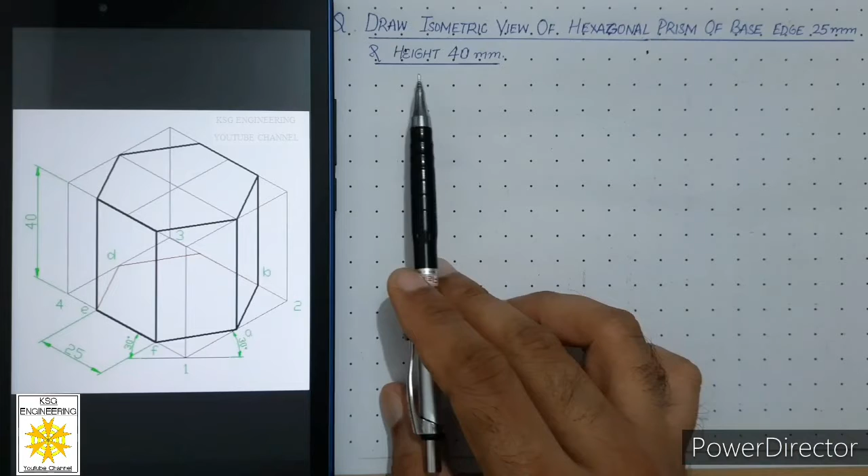Welcome students. Today we will solve isometric view of hexagonal prism of base edge 25 mm and height 40 mm.

So let us see what steps we need in order to draw the isometric view of hexagonal prism. The very first step is we have to draw hexagon on the grid sheet. In this question, we are given hexagonal prism whose base edge is 25 mm. It means hexagon is of 25 mm. So first of all, we will draw hexagon on the grid sheet.

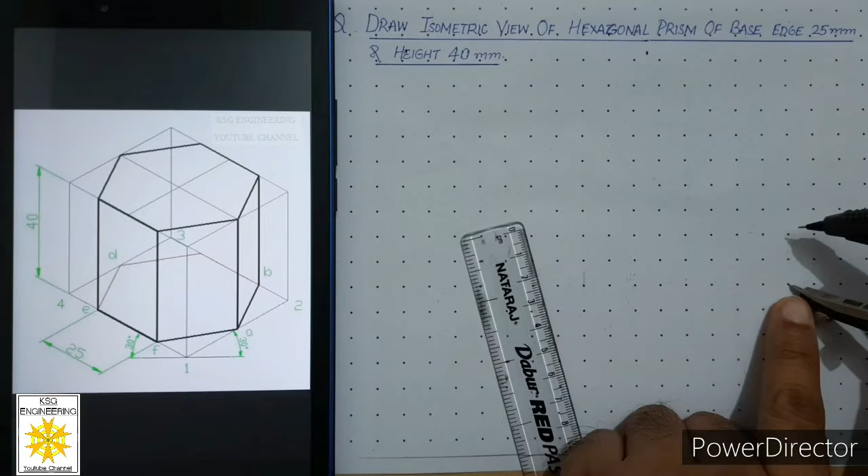So in order to draw the hexagon on the grid sheet, we have to see the size of the hexagon. So size of the hexagon is 25 mm. So we will open compass to 25 mm and we will place compass on a particular dot. Let us say this dot, and we will draw a continuous thin circle. We will keep it thin, and the radius of this circle is equal to the length of the side of the hexagon, that is 25 mm.

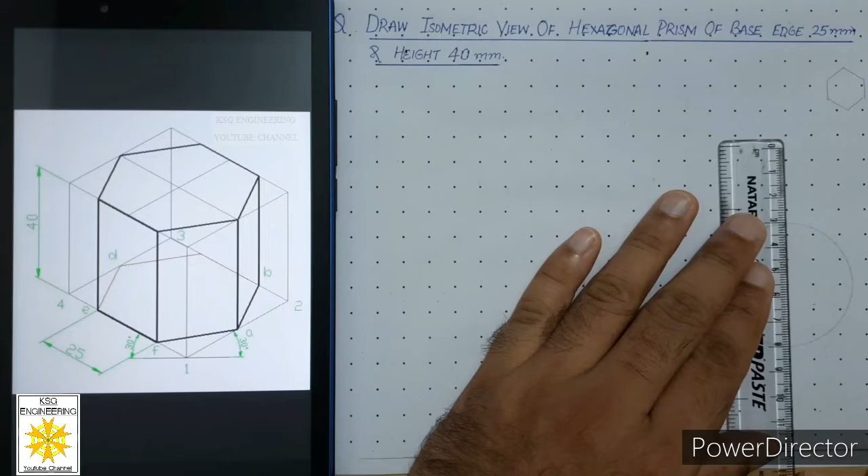Now after this, we will draw vertical diameter of this circle if we want this position of the hexagon. So let us draw vertical diameter. So we will line our scale with this column and we will draw a continuous thin line over here. This is the vertical diameter of this circle.

Now we will open compass again equal to 25 mm, which is the size of the hexagon, and we will place compass at this diametric end and we will cut circle on both sides by thin curves. So the size of the compass is equal to the size of the hexagon, 25 mm. After that, we will place compass at this point, that is the second diametric end, and we will cut circle on both sides of this vertical diameter.

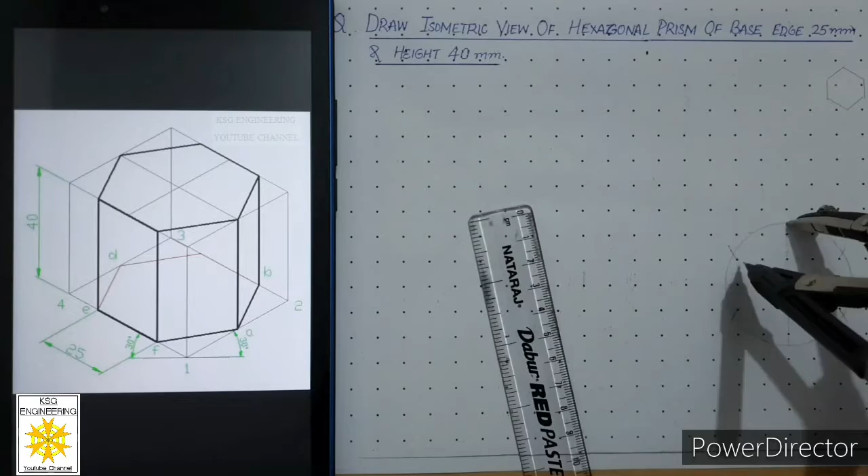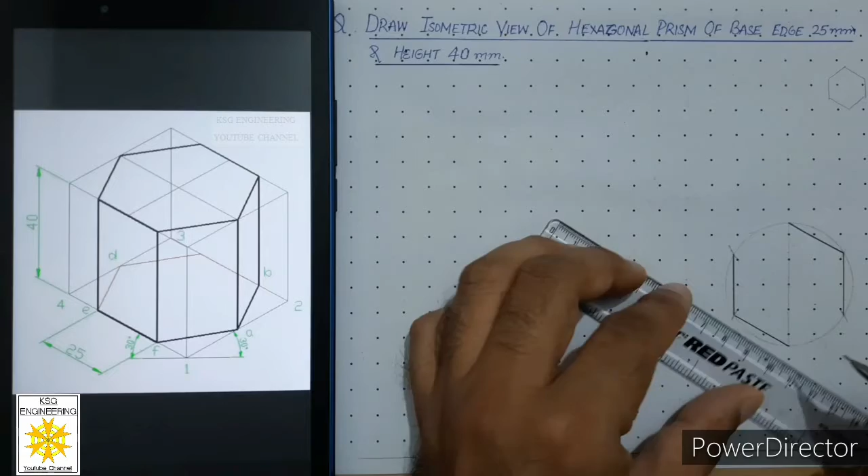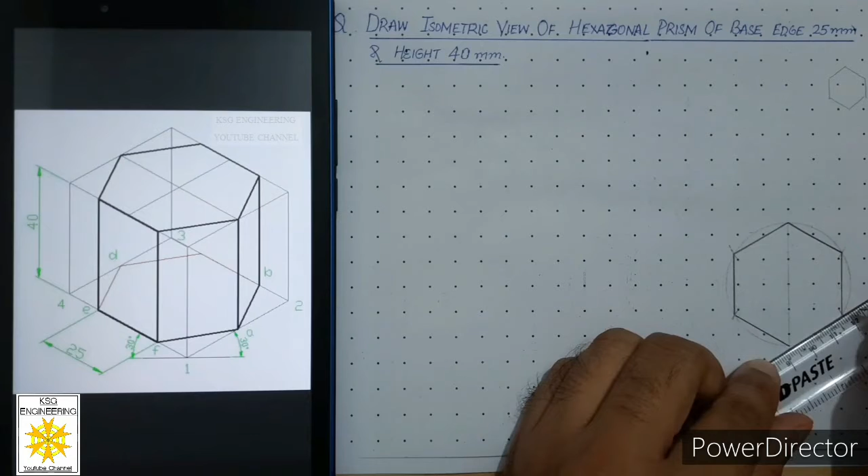Keep arcs thin. Then after that, we will join these 2 points with the help of straight line. Then we will draw straight line in between these 2 points. Then we will connect these 2 points with straight line. Then we will connect these 2 points. We have to draw a hexagon thick over here. Now let us connect these 2 points with straight line. Now let us connect these 2 points with straight line.

So in the first step, we have to draw the hexagon on the grid sheet. Now after this, we will erase this circle. Now we will name the hexagon. Let us start from this point and let us name it as A, B, C, D, E, F.

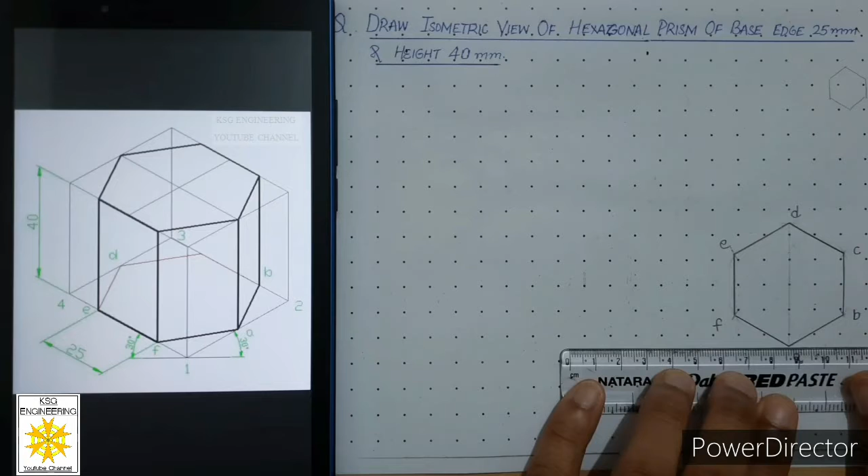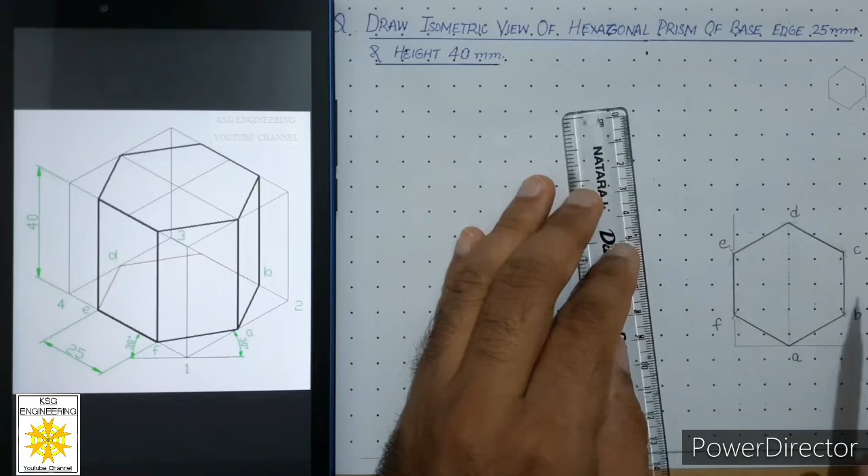And after this, we will enclose this hexagon inside a box. So for that, at this point of the hexagon, we will draw continuous horizontal line, continuous thin line, and then we will draw continuous thin line over here. That means we will extend this side of the hexagon on both sides with continuous thin line. Then we will extend this side of the hexagon on both sides with continuous thin line.

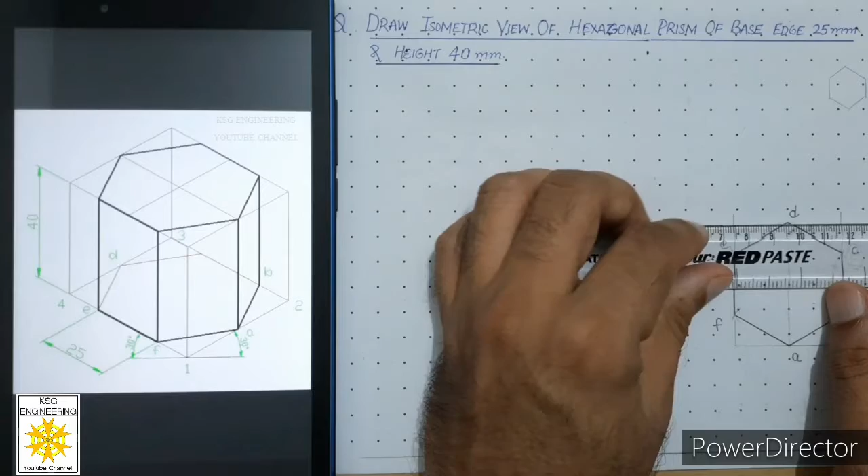Then from this point of the hexagon, we will draw horizontal line and we will keep that line continuous thin. So we have enclosed this hexagon inside a rectangle. So let us erase these extensions. Remember, we have to keep this box thin. Now we will name the box also. Let us name it as 1, 2, 3 and 4. So second step is enclose that hexagon inside a box.

In the next step, we will draw the isometric view of hexagonal prism. So remember one thing, whenever we have to draw isometric view of a hexagonal prism, first of all we have to assume that hexagonal prism is enclosed inside a box. So first of all we have to draw isometric of that box first, and after that inside the isometric of that box we will draw isometric of hexagonal prism.

Now in this case the length of this box will be equal to the distance across flat faces of the hexagon, and width of this box will be equal to distance across the corners of the hexagon. Now at the start we don't know what will be the distance across flat of the hexagon or across corners of the hexagon. So in order to know those distances we have done this step.

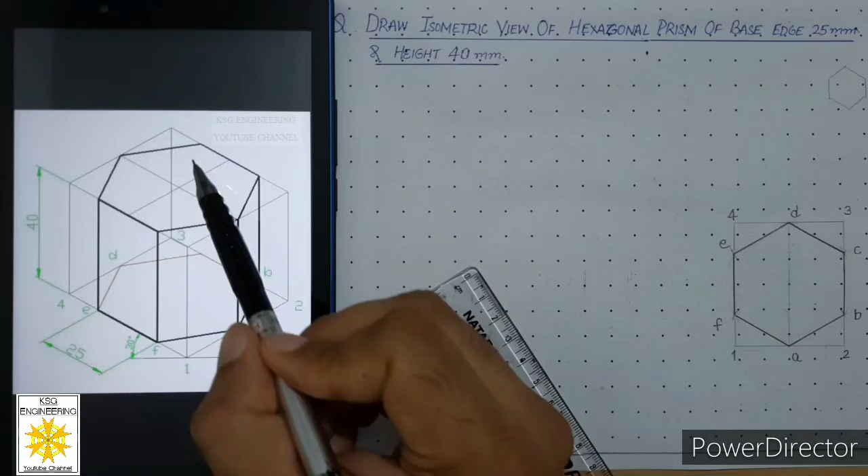Actually in this step what we are representing is that this is the top view of the hexagonal prism. When we look at this prism from top, we will see a hexagon only. And if we have assumed that the hexagonal prism is enclosed inside a box, then from top along with the hexagon we will see the top view of the box also.

That is why after drawing the hexagon we have drawn that box. So this is the top view of this situation when the hexagonal prism is enclosed inside a box. So from top we will see the top face of the hexagonal prism, that will be a hexagon, and we will see the top face of the box, that will be a rectangle.

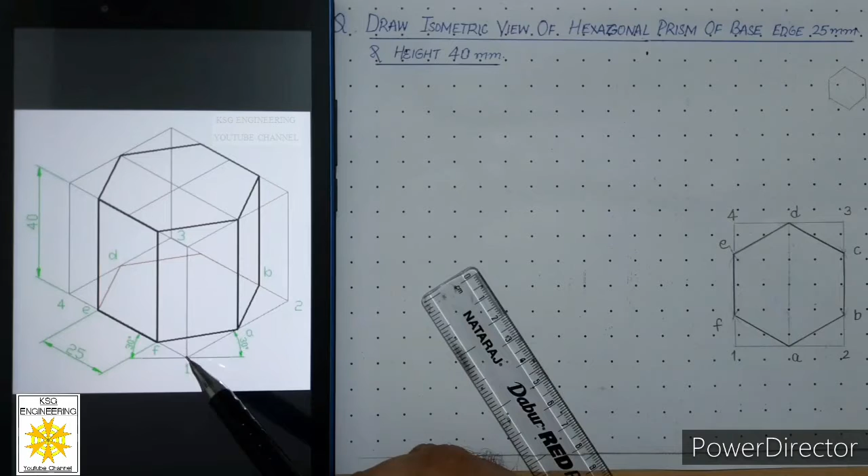Now from this particular drawing we will get the distance across flats of the hexagon, that will be the length of the box, and we will get the distance across corners of the hexagon, so that will be the width of the box. That is why this step is important and we have to do this step first.

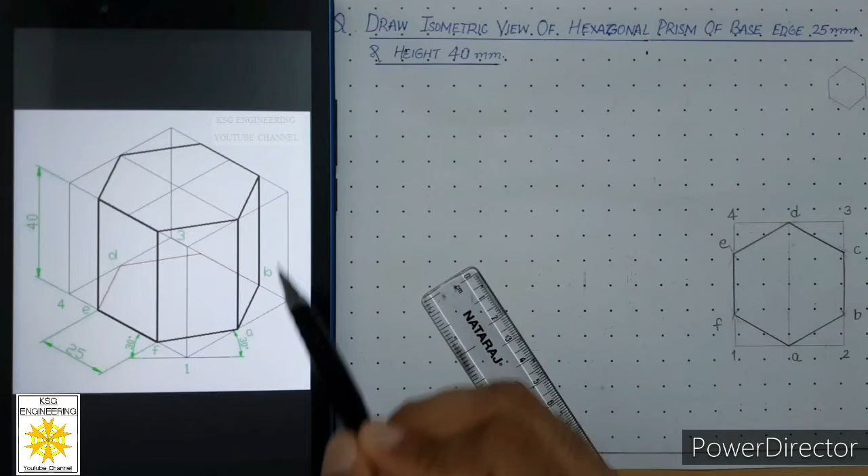From this step we will get to know the length of the box and the width of the box, because before drawing the isometric view of the hexagonal prism we need to draw the isometric view of the box. So this method is known as box method. Okay, so let us start with the drawing of the isometric view of the box.

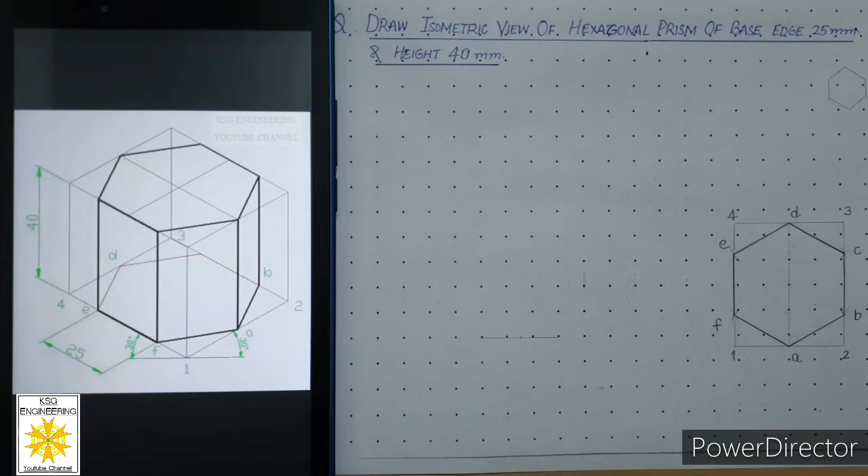So for that we will align our scale with this row and we will draw a continuous thin line of around 30 millimeters. On that line we will mark a point, and on that point we will put our protractor and we will draw two lines on both sides at 30 degrees. So these two are called isometric axes.

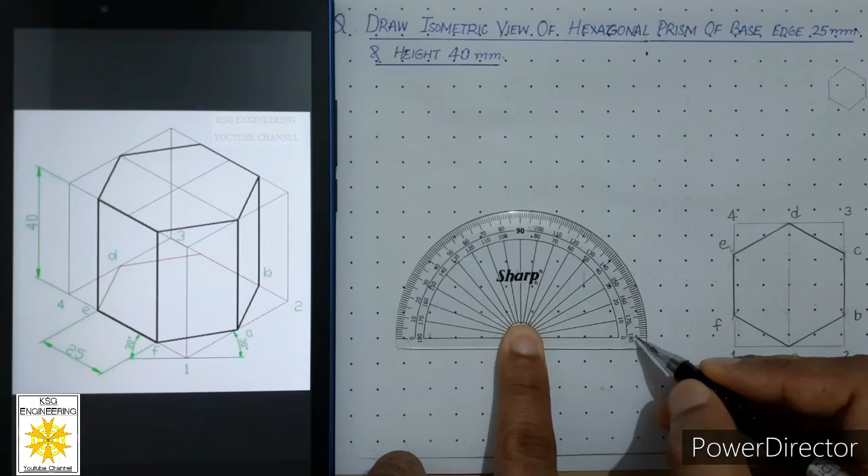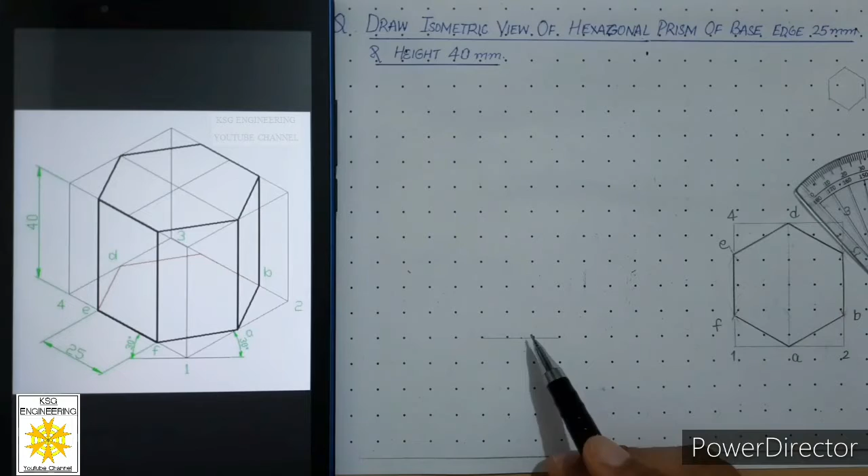So let us mark a point at 30 degrees on this side. Similarly mark a point at 30 degrees on the other side. After that we will align these 2 points with the help of the scale, and we will draw a continuous thin line that will be called an isometric axis. Then we will align these 2 points and we will draw a continuous thin line of any length at the start. So this is the second isometric axis.

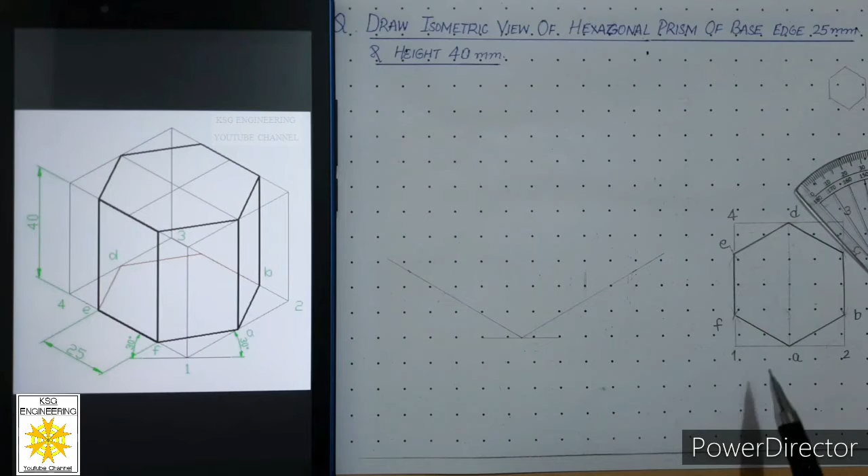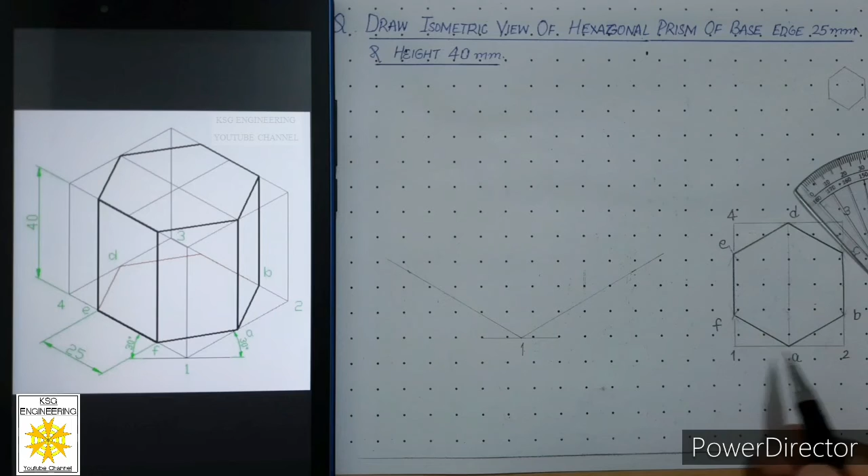Now first of all we need to draw the isometric of the box, and we know the length of the box is equal to this distance, that is 1 2. So let us assume that this point is 1. So let us mark it as 1. So on this axis we will draw the length of the box, which is equal to the distance between 1 2. So let us measure this distance with the help of the compass.

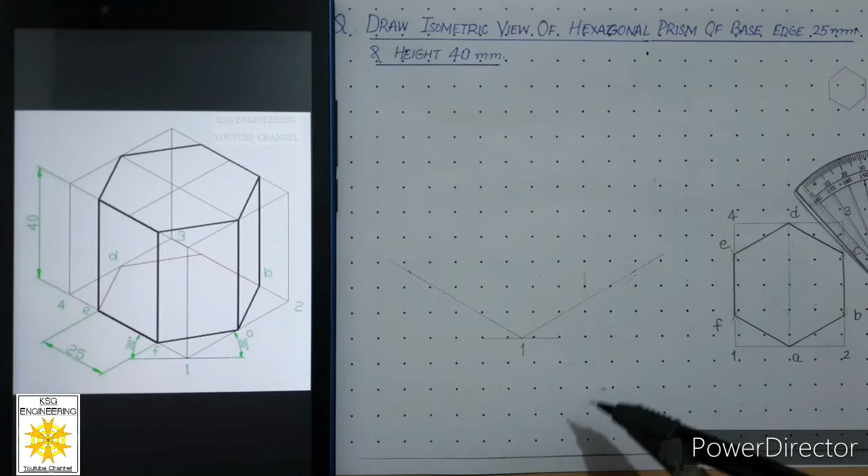Now we will draw that distance over here, meaning we will cut this isometric axis to that distance. So for that, put your compass at this intersection, that is point 1, and mark an arc on this isometric axis. And this point is point number 2. So let us label this as point number 2.

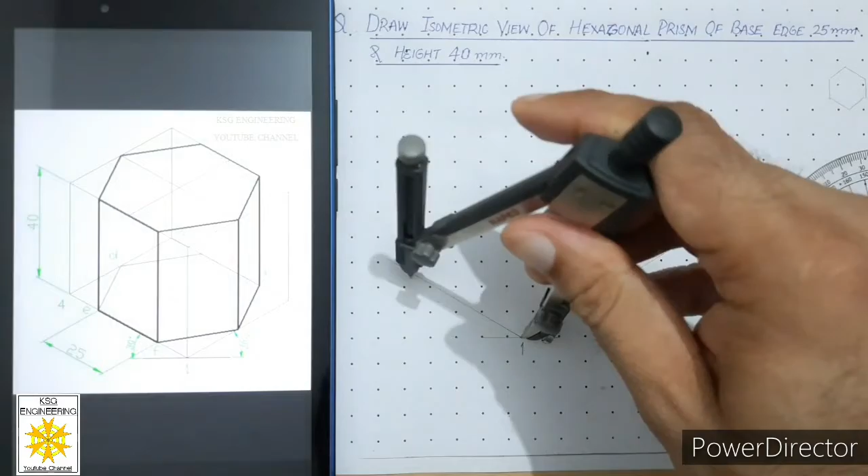On this side we will cut the width of the box. So the width of the box is 1 4. So let us measure its width, that is 1 4, with the help of the compass, and from point 1 cut this axis to the same distance. So this intersection is point number 4.

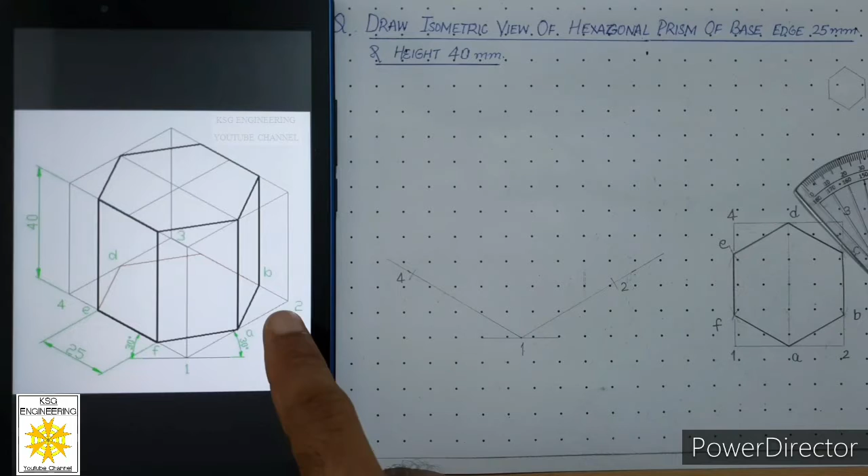After that, we will measure this distance again, that is 1 2, because in front of the length we have to draw a second length, because in order to draw the isometric of this box we first have to draw its base, or you can say the bottom face. So for the bottom face, after drawing length and width, we have to draw two more edges. So in front of width we have to draw width, in front of length we have to draw length.

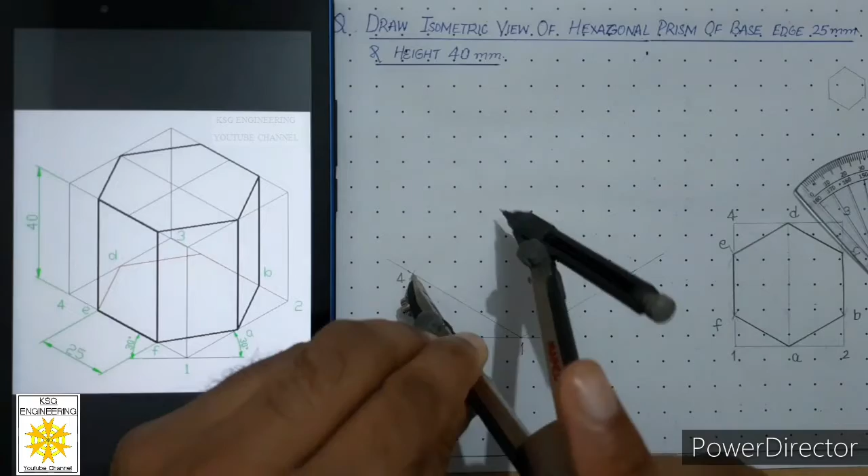So for this, we will measure this distance, that is 1 2, with the help of the compass again, and from point number 4 we will draw this arc. We will draw a thin arc over here. Now we will measure distance 1 4, that is the width of the box, and from this point we will draw another arc which will cut the first arc. So this is point number 3.

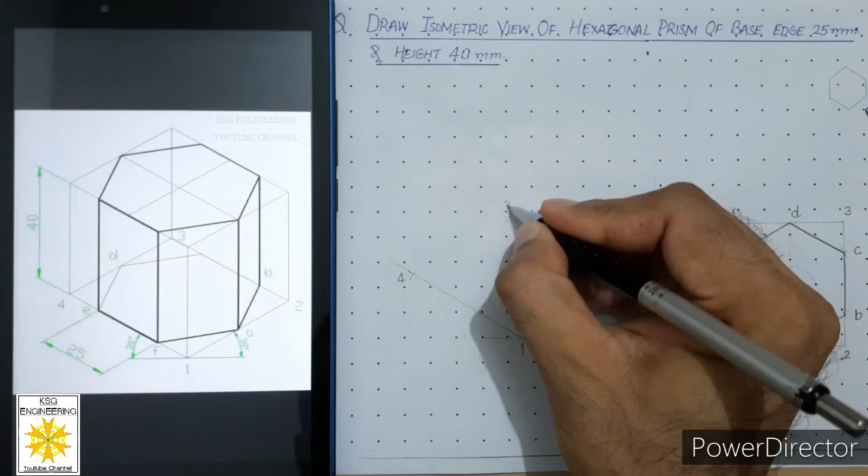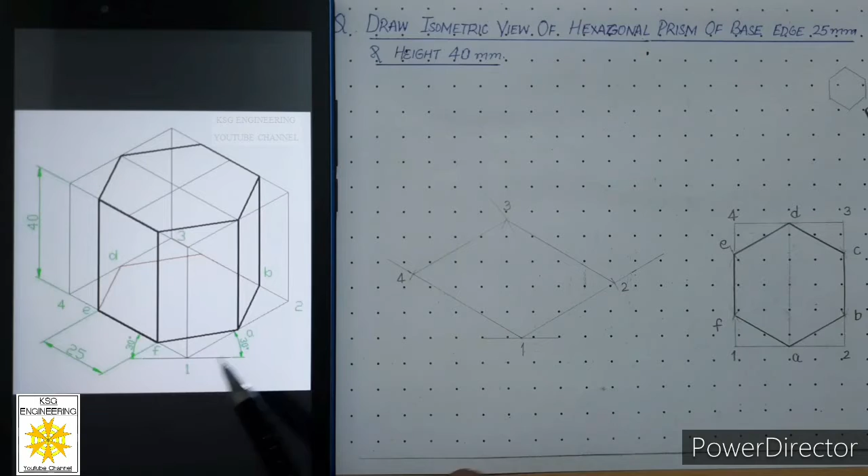Now after this we will connect these 2 points with thin lines. So you can see we have created the base of the box, that is the bottom face of the box. Now after this, we will raise these 4 corners of the box equal to the height of the prism given in the question, and that height is 40 millimeters.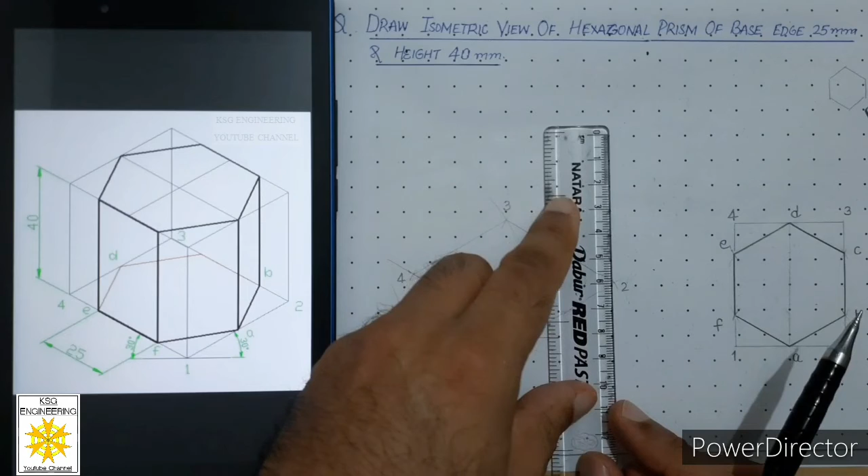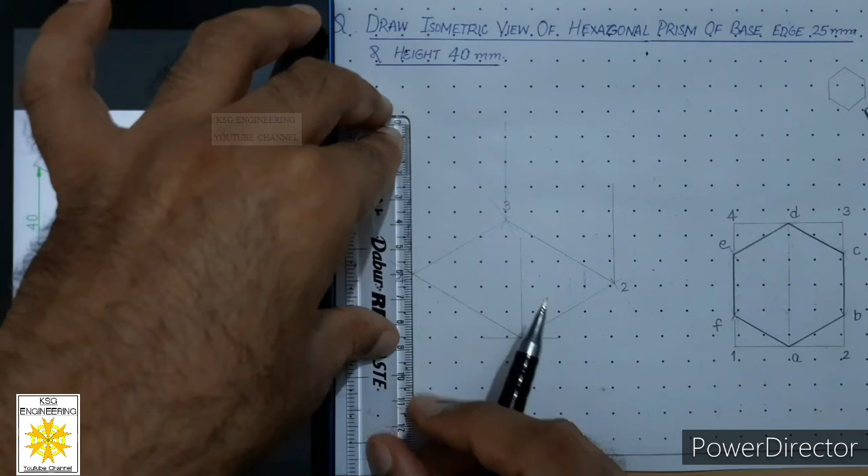So from these 4 corners we will draw vertical lines of 40 millimeters, and these lines must be continuous thin, and lines must be vertical, so align your scale carefully. Then from this point also, make sure lines are vertical, so align your scale carefully.

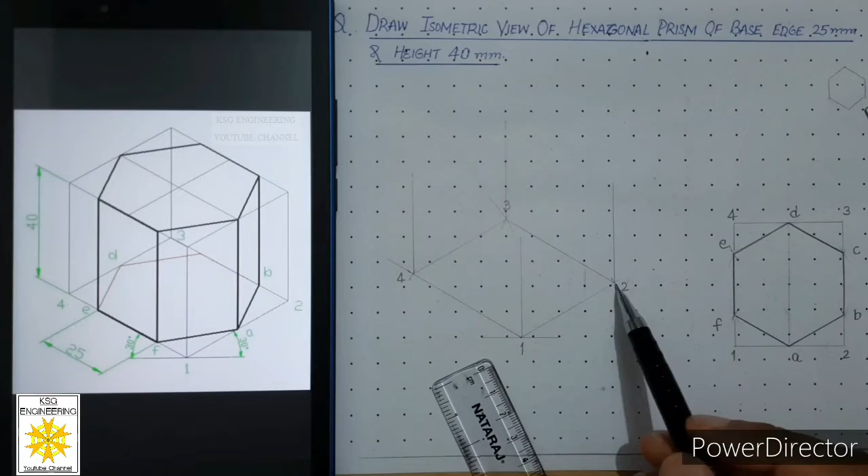So we have drawn vertical lines at 4 corners of the bottom face, meaning we have drawn the height of the box, that is 40 millimeters, equal to the height of the prism. Then we will connect these points at the top with continuous thin lines to draw the top face of the box. Remember, draw thin lines.

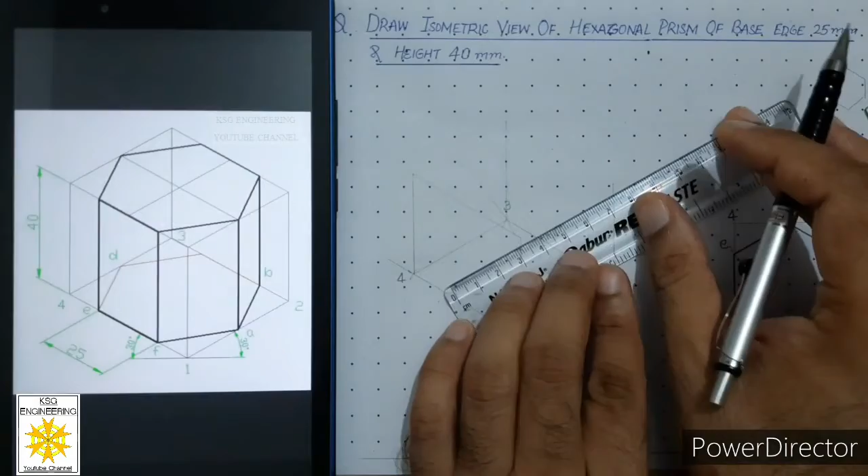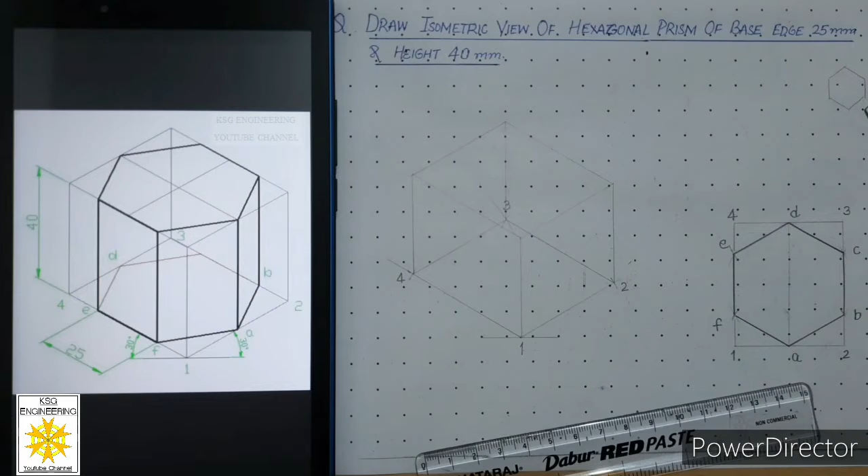So we are ready with the isometric of the box, in which we have assumed that the hexagonal prism is enclosed. Now we will draw the isometric view of this prism. So at the bottom face of the box, we will draw the bottom face of the prism, that is a hexagonal base. It means in this isometric of the bottom face of the box, we will draw the isometric of the hexagon. So let us see how we can draw.

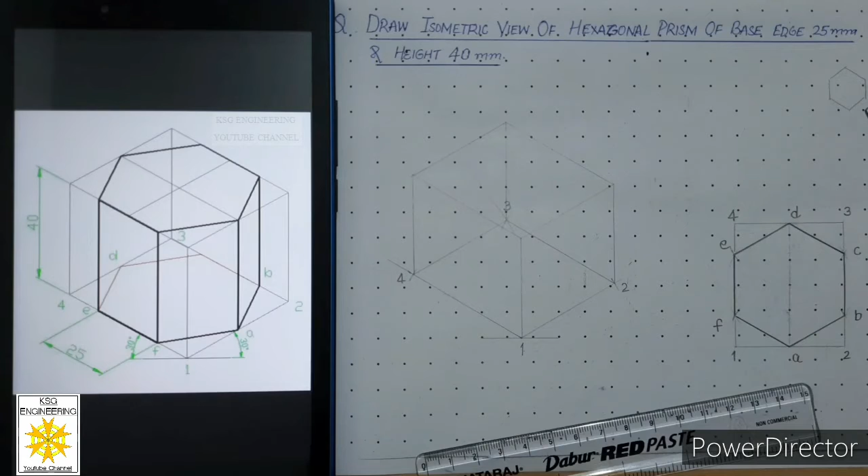Now you can see over here, this is the bottom face of the box, let us say, and let us say this hexagon is representing the bottom face of the prism. So in order to draw this hexagonal shape inside this box, we have to locate these 6 points on these 4 sides of the box. You can see on this side 1, 2, we have point A. So on this side 1, 2, we have to locate that point.

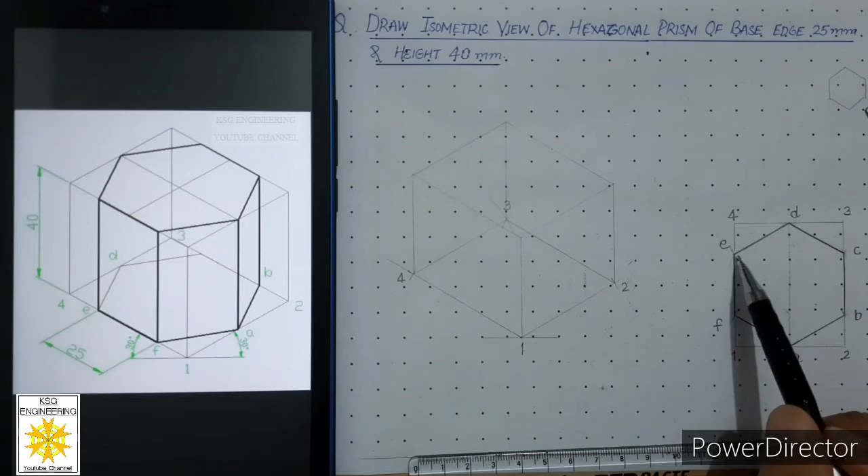Then on this side 2, 3, we have 2 points B and C. So these 2 points we have to locate on this side. Similarly on side 3, 4, we have point D. So we have to locate point D over here. Similarly, we have to locate points E and F of the hexagon between side 4, 1. So let us first locate this point A, which is in between 1, 2, that is on this side. So for that we need a compass.

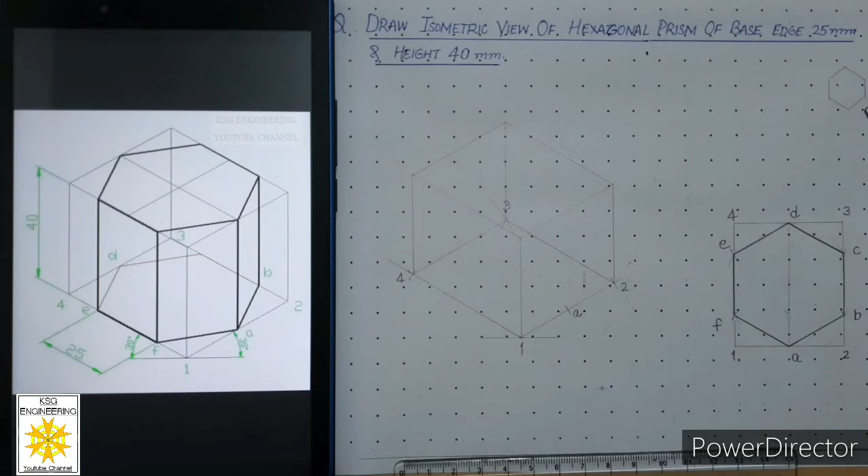We will put the compass at 1 and we will measure this distance, that is 1A. And we'll put the compass at this point and we'll mark that distance on this side labeled as 1, 2 over here. So this point is A. Now between side 2 and 3 we have 2 points B and C. So let us locate point B first, and remember, always measure distances from the corners. Don't measure distance from A to B, that will give wrong results.

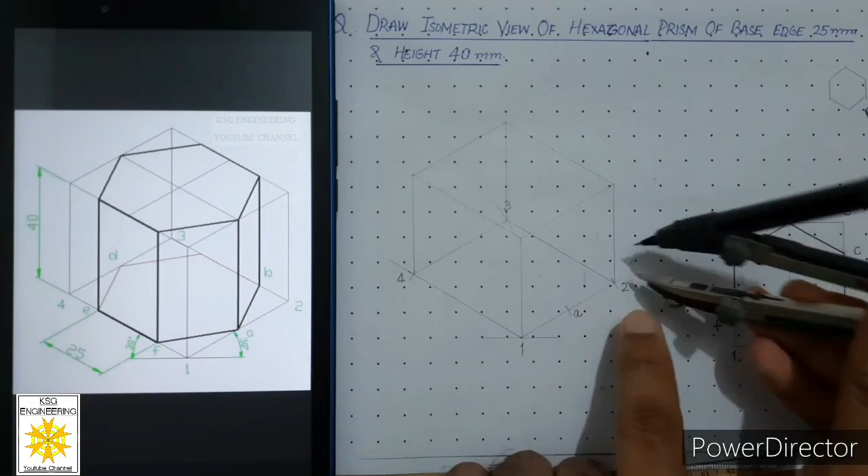Measure distance from the corners of the box, means from point 2 measure this distance to B and place your compass at 2 and mark that distance on this side. Now this will be called point B. After that we will measure 3C, that will be the same as that of 2B, but still let us measure. So see, it is the same.

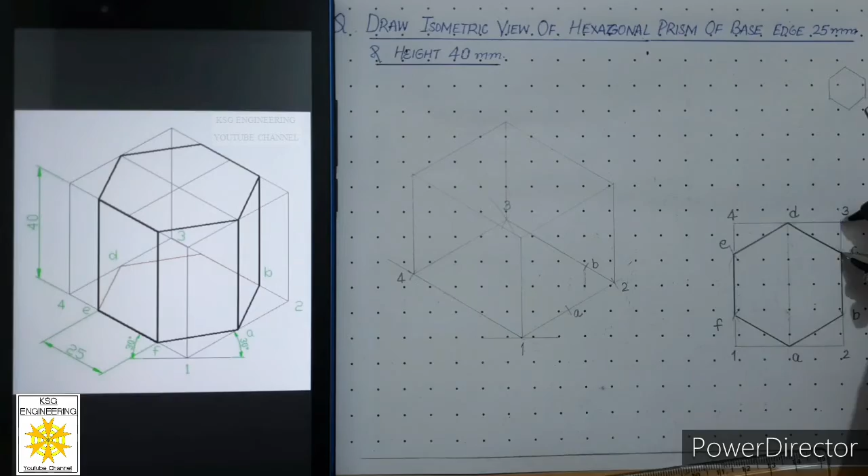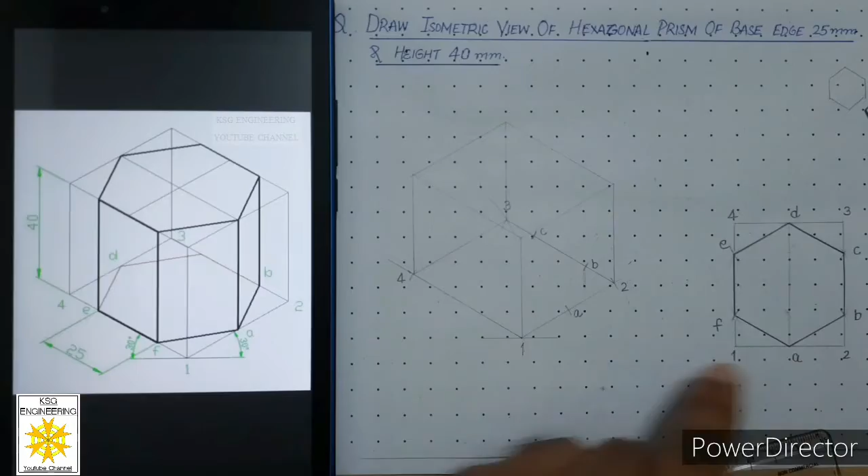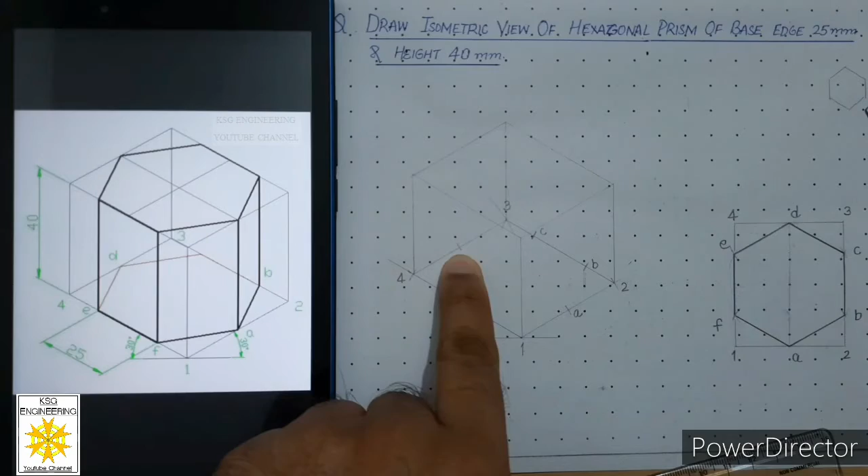So from point number 3, cut that distance on this length. Draw a thin arc. So this is point C. Then we will measure distance from 3 to D, which is equal to 1 to A. So put your compass at 3 and cut this length 3 to 4 by drawing an arc. So this point is point D.

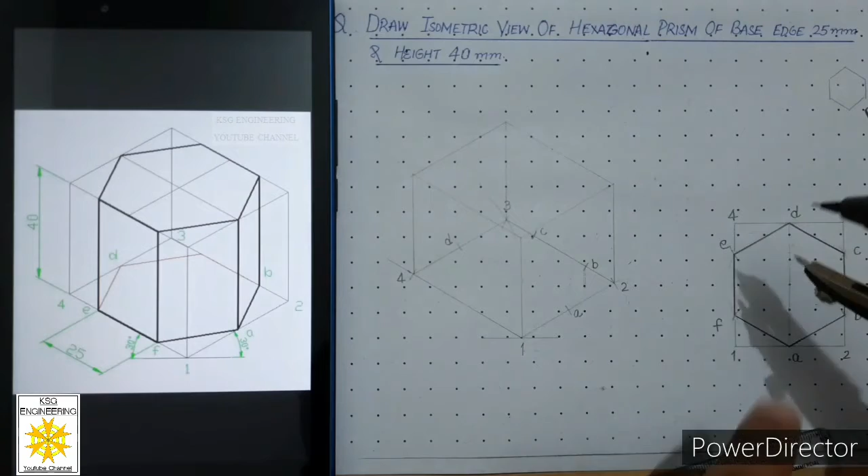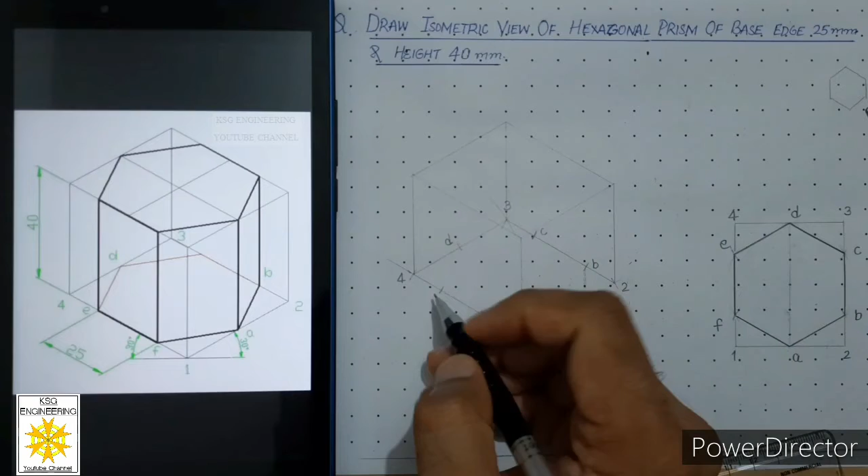Now after this we will locate these 2 points. So measure 4E and from this point 4 cut this edge 4, 1 with a thin arc. So that will be called point E. Now 4E is equal to 1F. So with the same distance, mark a point from 1 on this edge. Draw an arc. So this is point F.

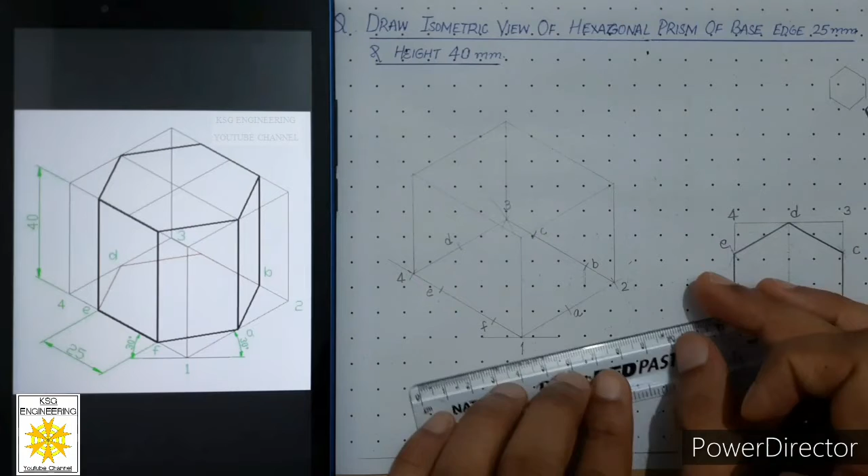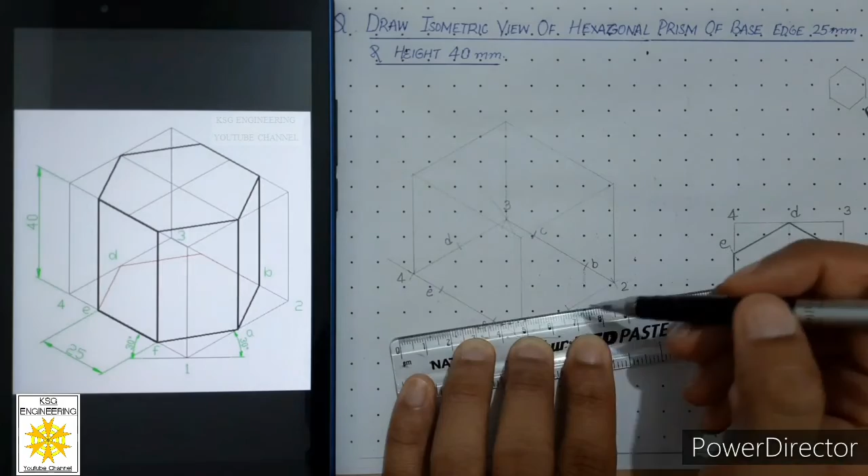Now we will join these points first with continuous thin lines. Why thin lines? Because you can see some edges of the base of the prism will be hidden behind the front faces. So we are not sure at the start which edges will be hidden. So at the start we will draw all the edges thin, and we will complete the isometric of the base of the prism, that is the isometric of the hexagon. So you can see we have drawn the base of the hexagonal prism.

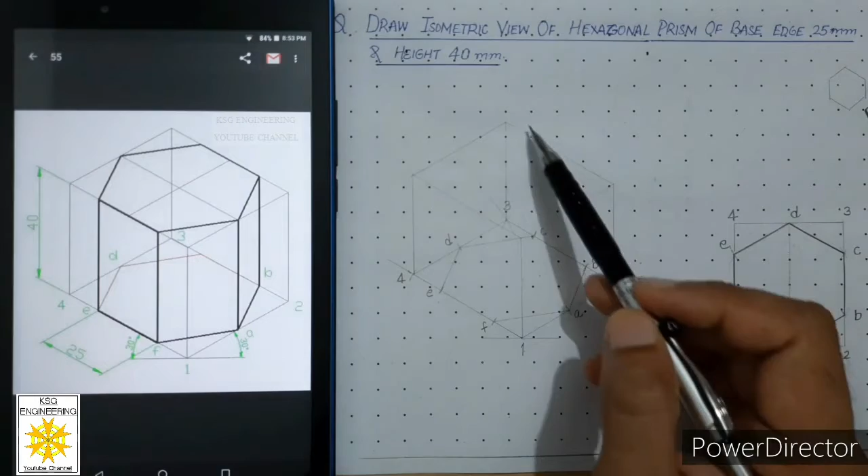Now in a similar manner we will draw the top face of the hexagonal prism, and that we have to draw over here, that is on the top face of the box. So we have two choices. Either we follow the same steps, means measure 1A, mark from here, measure 2B, mark from here, similarly measure 3C, mark from here, means repeat the same steps at the top face of the box.

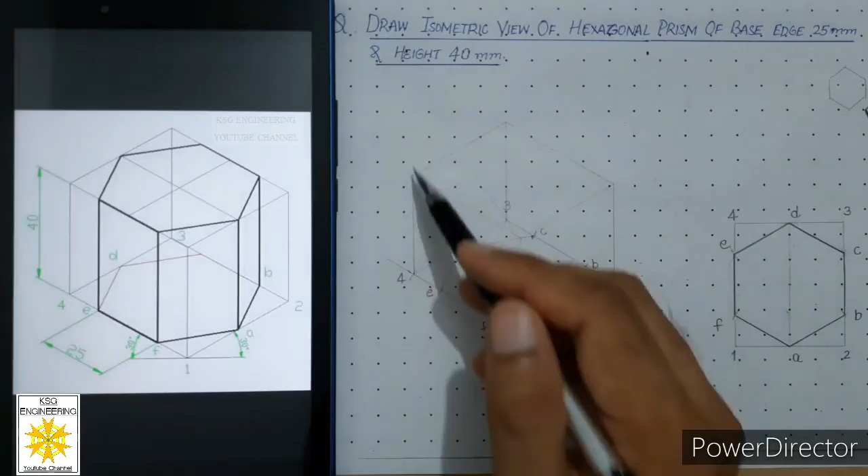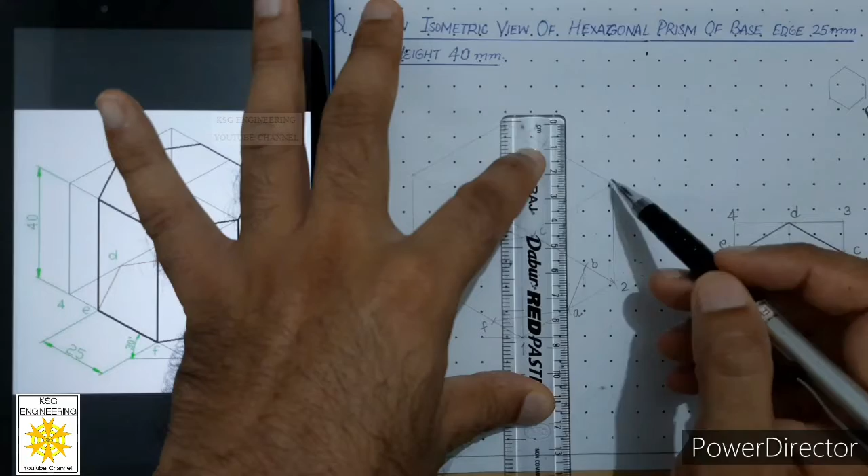Our second method is that from these points you can draw continuous thin lines in vertical direction up to the opposite edge. So to this edge, this is the opposite edge. So from point A, draw a continuous thin vertical line up to that edge, but make sure these lines are vertical. Similarly to this edge, this is the opposite edge. So line your scale with point B and draw a continuous thin vertical line up to the opposite edge.

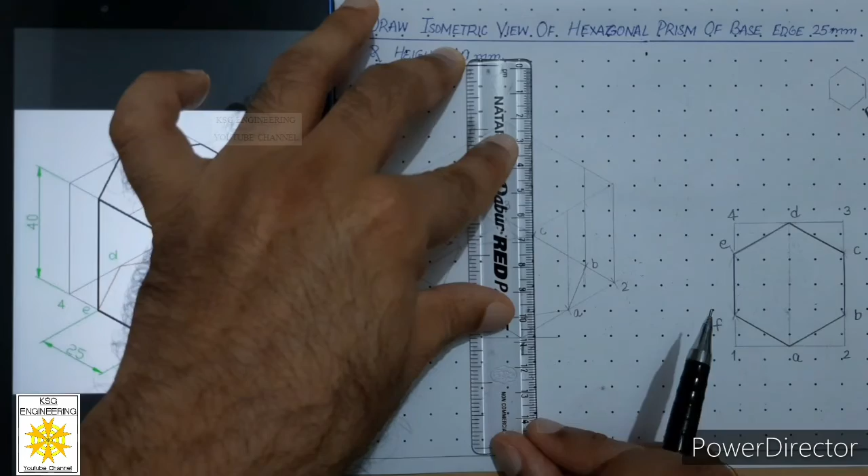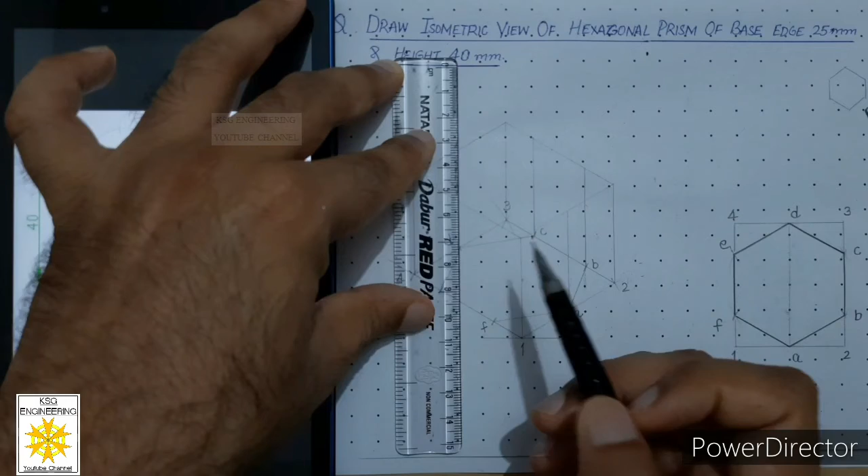Similarly from point C, you can draw a continuous thin line which should be vertical, and it should be up to the opposite edge. Similarly from point D, so opposite to this edge is this edge. So from this point, that is point D, draw a continuous thin vertical line up to the opposite edge.

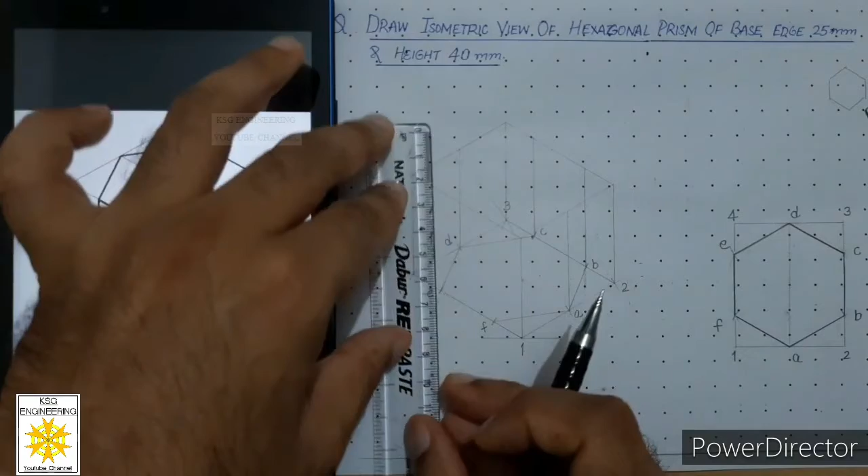Then from point E, do the same step. So for this edge, this is the opposite edge. Make sure scales should be vertical, otherwise the isometric view will not be correct. Similarly from point F. So we have obtained 6 intersections at the top face.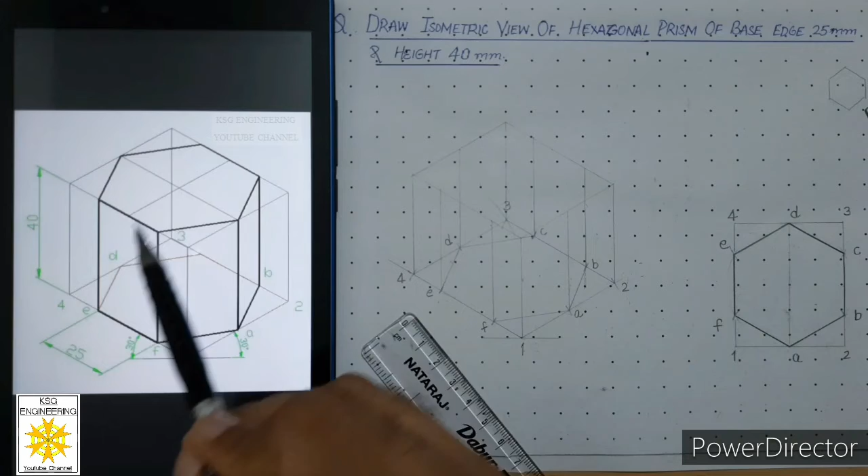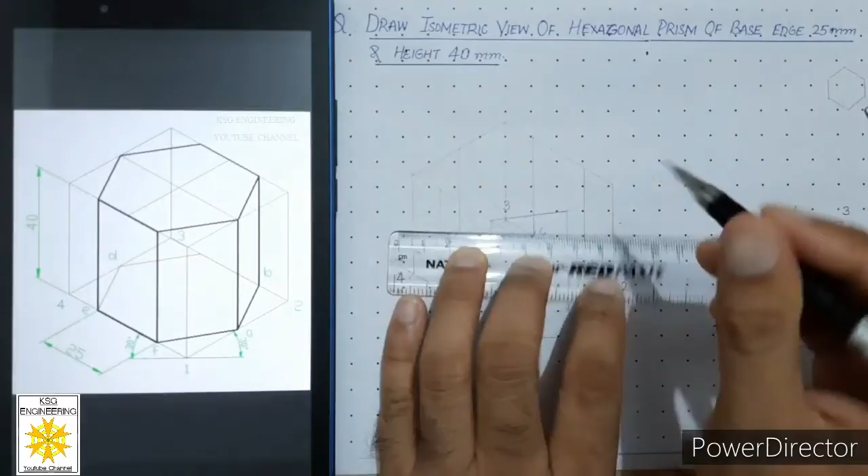And we know in the isometric of a hexagonal prism, the top face is clearly visible to us. So we will draw the top face of the hexagonal prism thick. So we will connect these 2 points with a thick line. Means we will now create the top face of the hexagonal prism, which will be the isometric of a hexagon. That we will draw by joining these 6 points with continuous thick lines. So you can see we have created the top of this hexagonal prism.

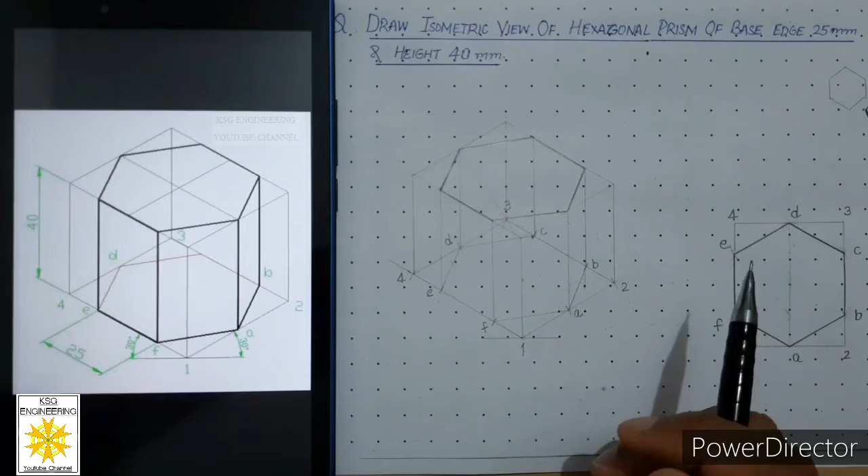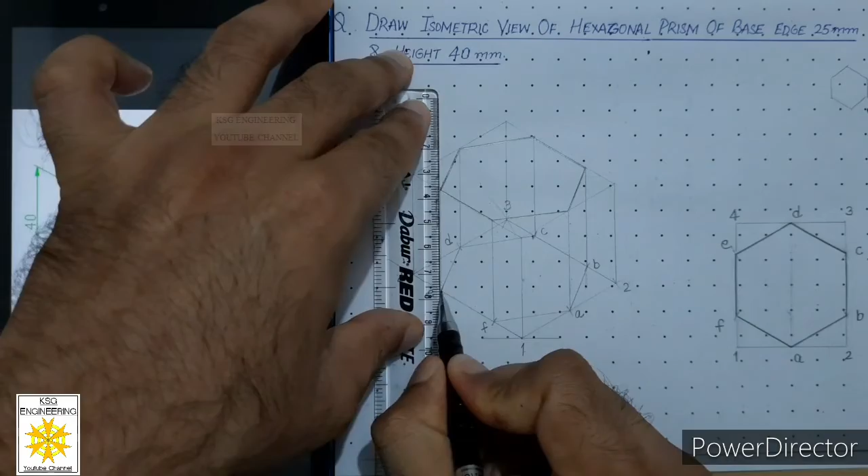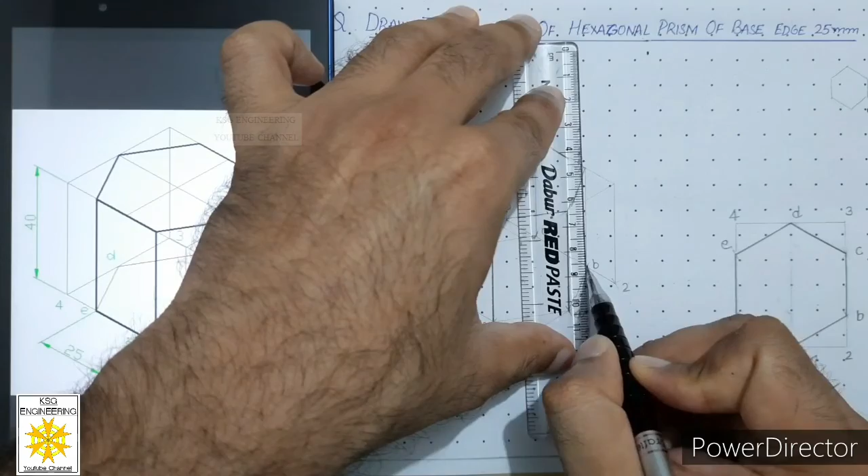Now we will show the visible edges. You can see this edge, this one, and over here. These 4 edges are visible from front. But these 2 edges, this one and this one, these are not visible. These are hidden behind these faces. So we will keep these thin and we will draw these edges thick. Now after that we will see the visible edges of the bottom face. So these three edges of the bottom face will be visible, so we have to draw these also thick.

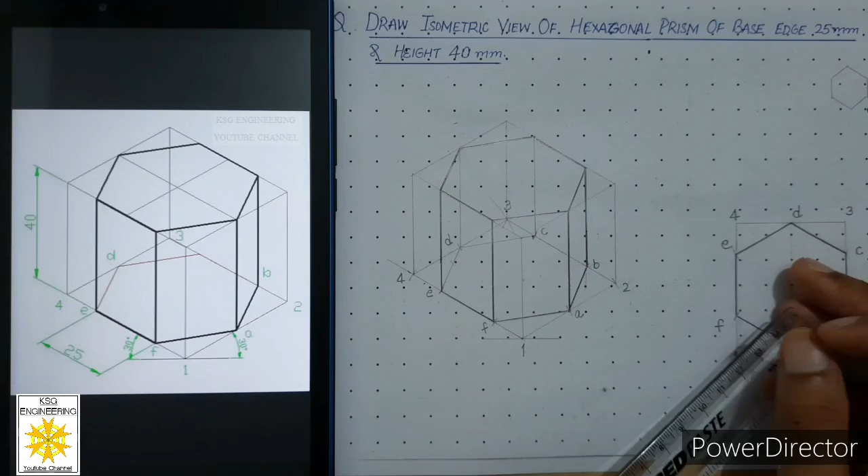So now we are ready with the isometric of the hexagonal prism. Now it's time to place dimensions. So let us place its height first. In order to place its height, we will use the height of the box, and we have to place isometric dimensions. So align your scale carefully with this isometric axis and leave 1 mm gap, draw a continuous thin line. So this extension line is parallel to this axis. So this is an isometric extension line.

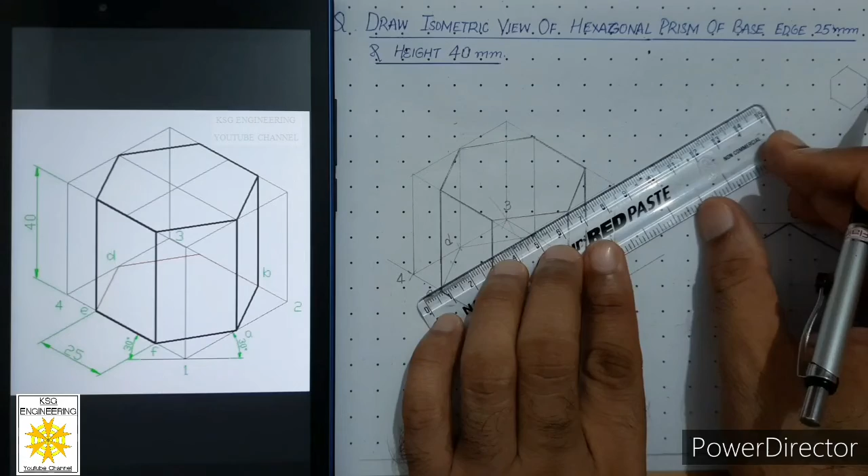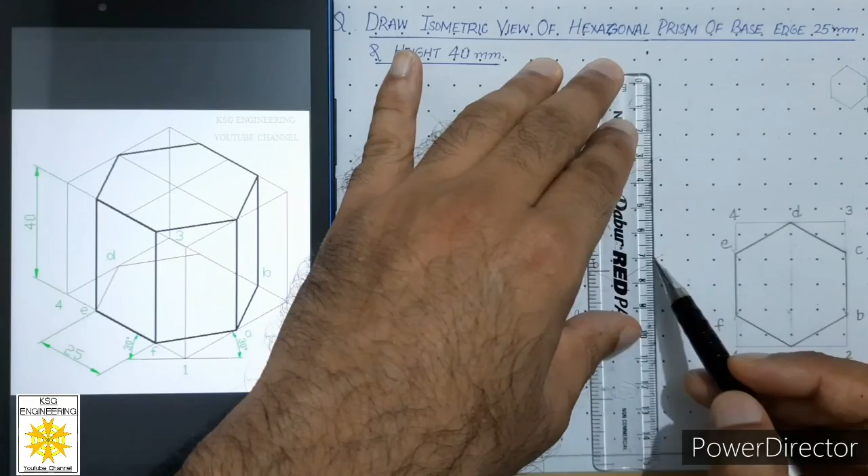Similarly, align your scale with this isometric line, leave 1 mm gap, draw a continuous thin line of around 15 millimeters. So now these two extension lines are parallel to this isometric axis, so these two are isometric extension lines. Now in between these two extension lines, we have to draw a vertical dimension line. Why vertical? Because the third isometric axis is the vertical axis, and we have to place height. So parallel to that axis, we have to place the dimension line. So this will be called an isometric dimension line. Add closed filled arrowheads on both sides in 3:1, and over here we will write in Gothic style 40 millimeters.

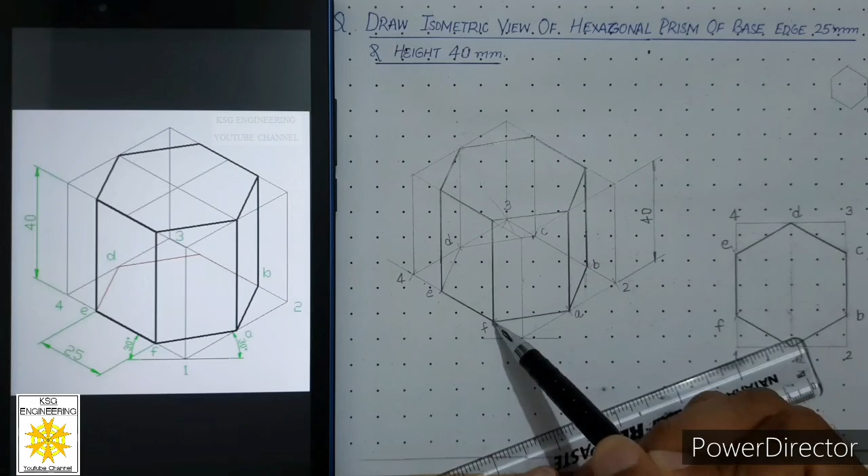Now after that we will place the base edge length. It is 25 mm. So for that what we will do? We have to search for an isometric edge of this hexagonal prism. Now you see over here in the front, three edges are visible to us, but these two edges are not parallel to any of these three isometric axes. So these are non-isometric edges or non-isometric lines. Only this edge is along this isometric axis. So this is an isometric edge. So for this we will place the length. So how will we place it? We will use a roller scale.

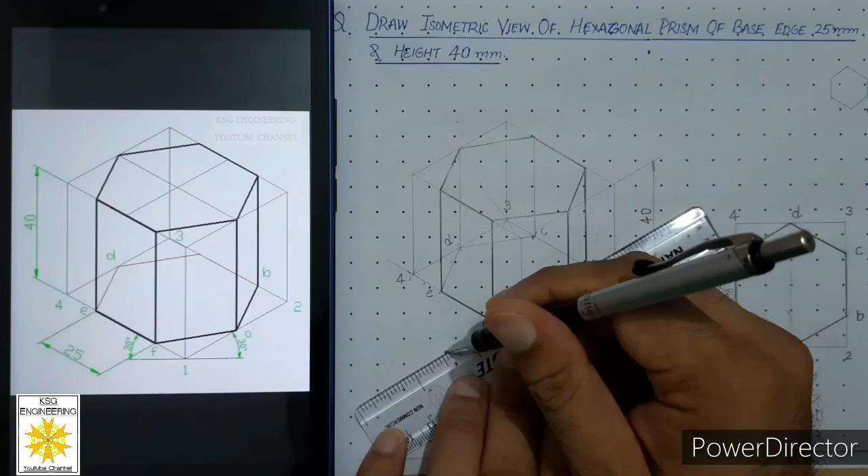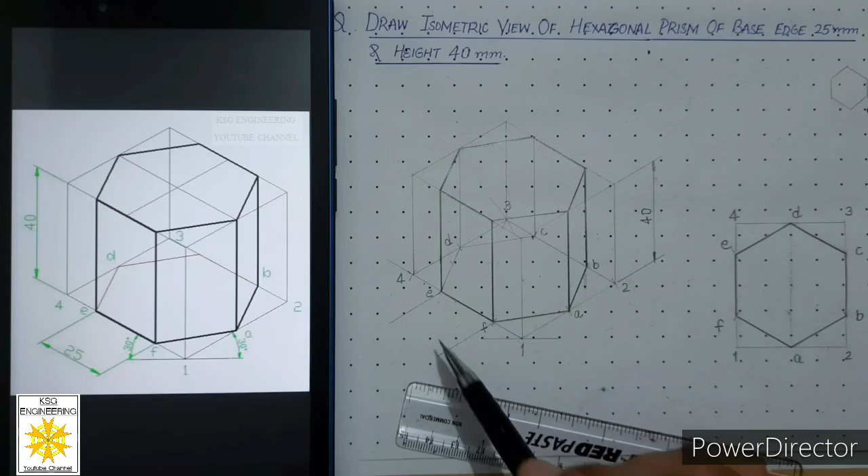Align your roller scale with this isometric axis and roll carefully to this point and leave 1 mm gap, draw a continuous thin line. This extension line must be parallel to this axis because we need to draw isometric extension lines. Similarly, roll to the next point, that is point E, and the scale should be parallel to the isometric axis. Leave 1 mm gap, continuous thin line of around 15 millimeters. Now you can see these two lines are parallel to this axis, so these two are isometric extension lines. Then align your scale with this axis, roll back by around 15 millimeters and draw the dimension line. This line is parallel to this axis, so this is also an isometric dimension line. And then we will place closed filled arrowheads on both sides, and we will place its dimension as 25 millimeters in Gothic style.

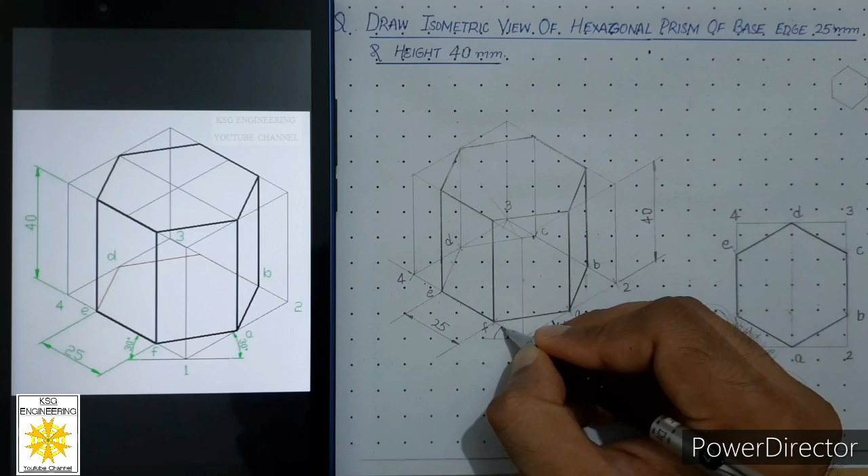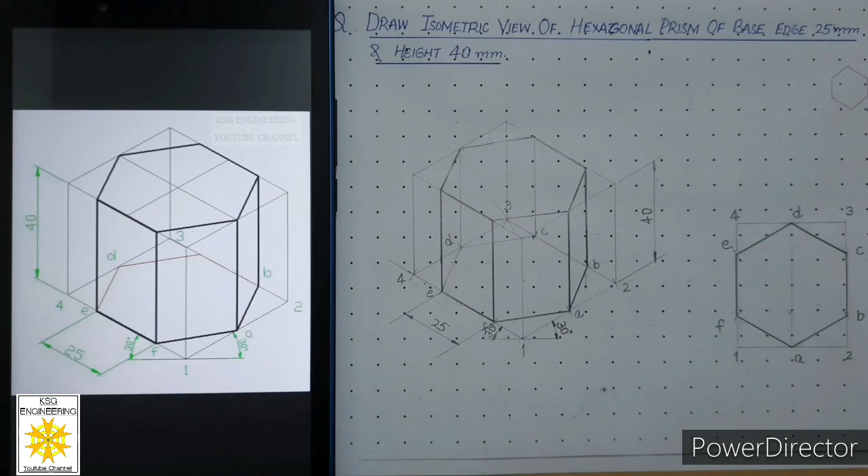Then after that we will place angles. So we know these two are 30-degree angles because we are drawing isometric views. So this angle is also 30 degrees. So place these angles carefully by drawing a curved dimension line. So we are ready with our answer. So this is the isometric view of the hexagonal prism.